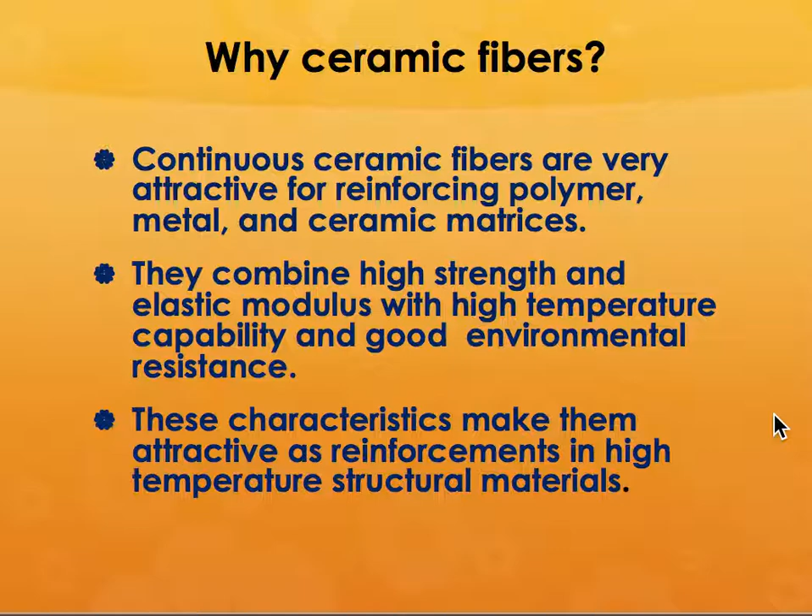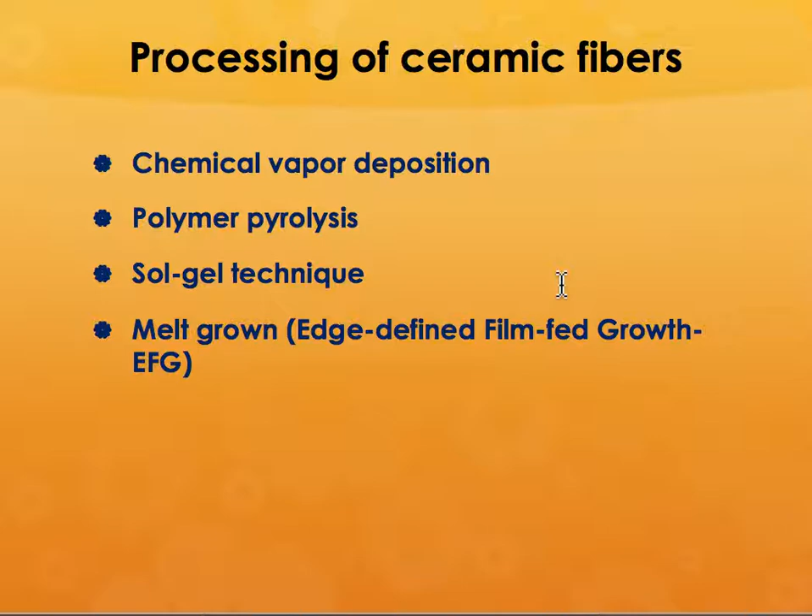So how do you process ceramic fibers? There are a couple of different ways to do that, and the most traditional method is chemical vapor deposition. You could also do it by a process called polymer pyrolysis or a sol-gel technique, where you take a squishy precursor, pull it through a set of dies, dry it, and heat treat it to get the high temperature properties of the material. You could also take a melt of the precursor and pull it through dies, but that is not as common as chemical vapor deposition or the sol-gel technique.

When we started out almost 25 to 30 years ago, there was a lot of effort being spent by the Department of Defense, Department of Energy, etc., to make ceramic components for automotive and other high temperature applications. But very quickly they figured out that it was necessary to reinforce this material with different kinds of fibers.

So when we started looking at silicon carbide fibers, silicon carbide matrices, or silicon nitride matrices, they figured out that you had to use something comparable - the silicon carbide fibers. But it was not easy to make silicon carbide fibers by the traditional methods. So what they did was use a substrate to deposit the silicon carbide matrix around it.

So the silicon carbide matrix was deposited around a wire of tungsten or carbon heated to around 1300 degrees centigrade. You take a reactive gaseous mixture such as hydrogen and methyl trichlorosilane, or what you would euphemistically call alkyl silanes.

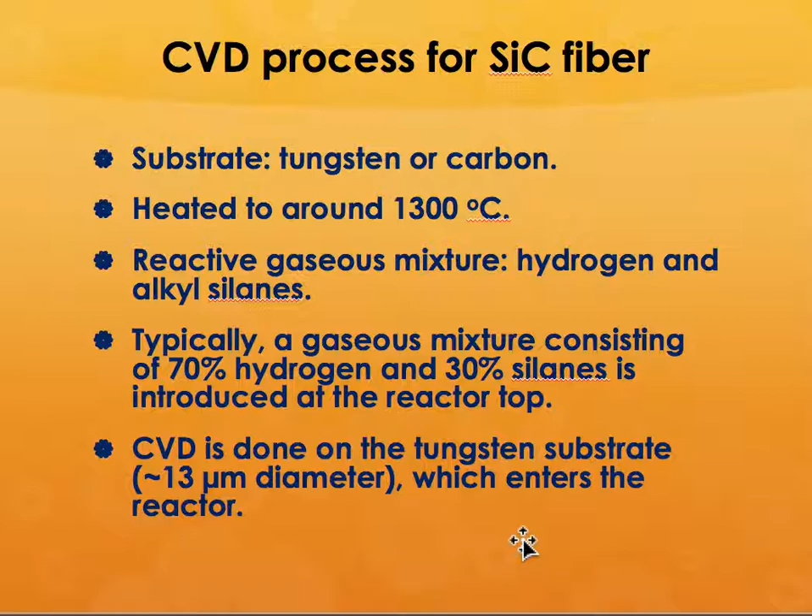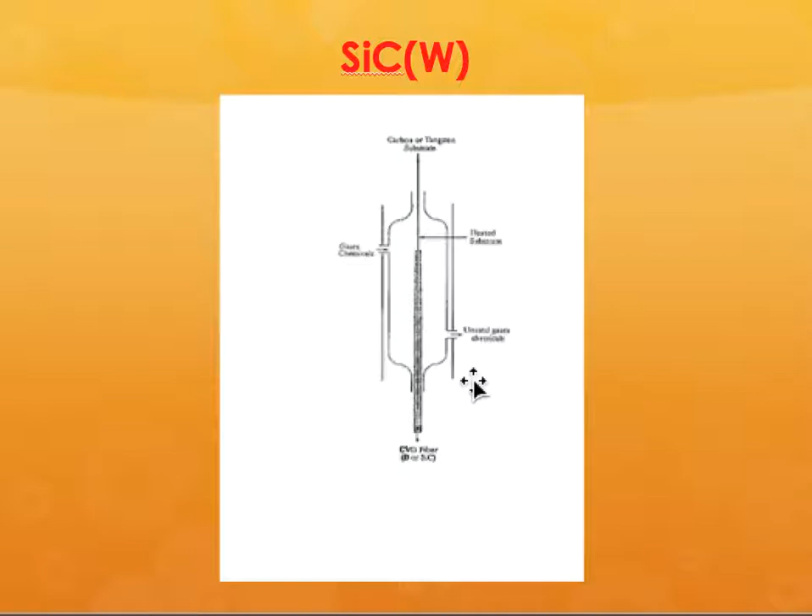So this is the schematic of the CVD process, where you are reacting it in a chamber, and while the fiber is being pulled through that, it deposits this silicon carbide matrix around the substrate.

As I said, it is methyl trichlorosilane, CH3SiCl3, and because it has one silicon and one carbon atom, you can get a stoichiometric ratio of silicon carbide. It forms a byproduct of hydrogen chloride gas.

Now what is special about hydrogen chloride gas? Hydrogen chloride gas is extremely noxious and corrosive, so you have to protect the inside of your chamber from getting attacked by the hydrogen chloride gas.

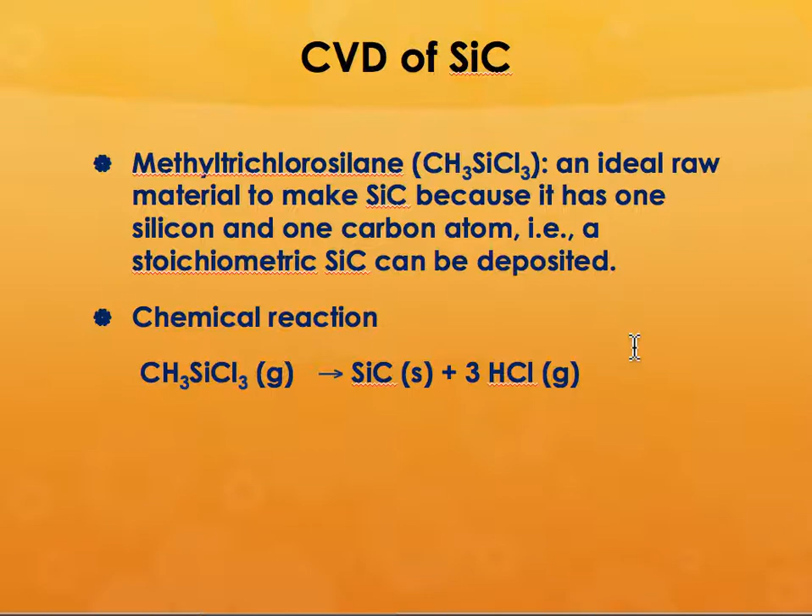Generally you mix free carbon and solid or liquid silicon with the silicon carbide itself. This monofilament can be as much as 100 to 150 microns, and unfortunately this large diameter fiber is not flexible. So you're taking maybe 100 of these pretty thick filaments, and you can't weave them. You can't do anything with that.

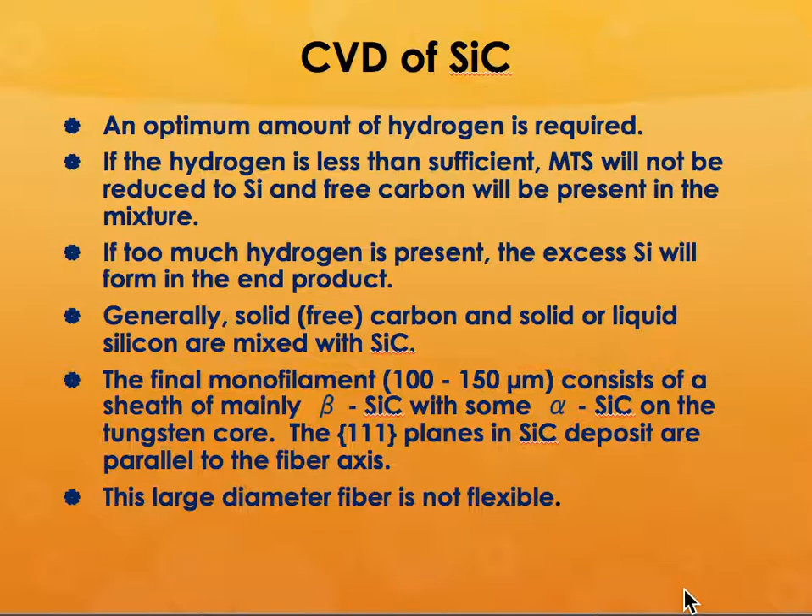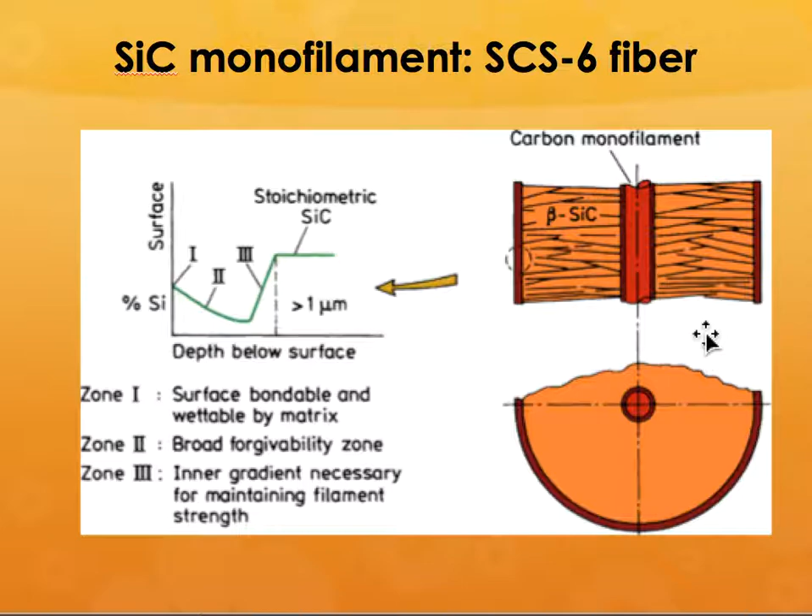This is again another schematic of the whole process. These fibers used to be called SCS-6. Now there are other technologies for making pure silicon carbide fibers, made in Japan and elsewhere, producing much smaller diameter fibers that can easily be woven.

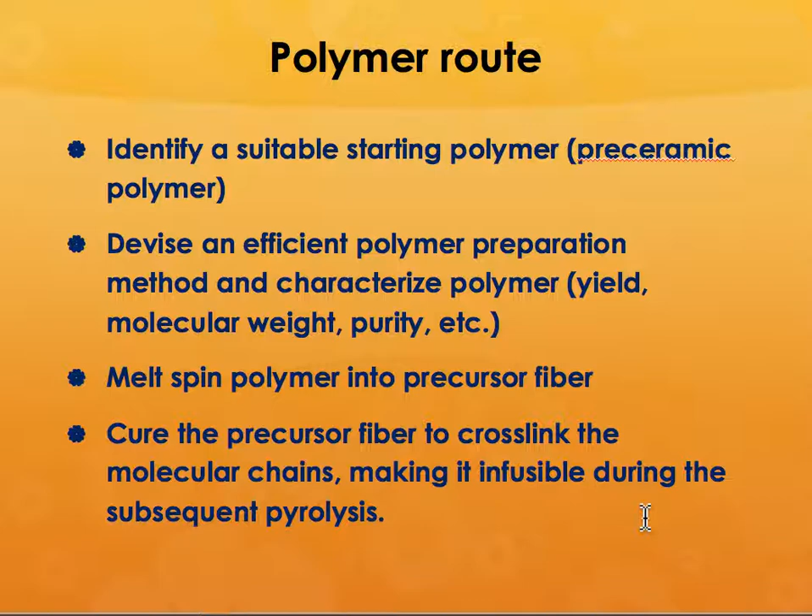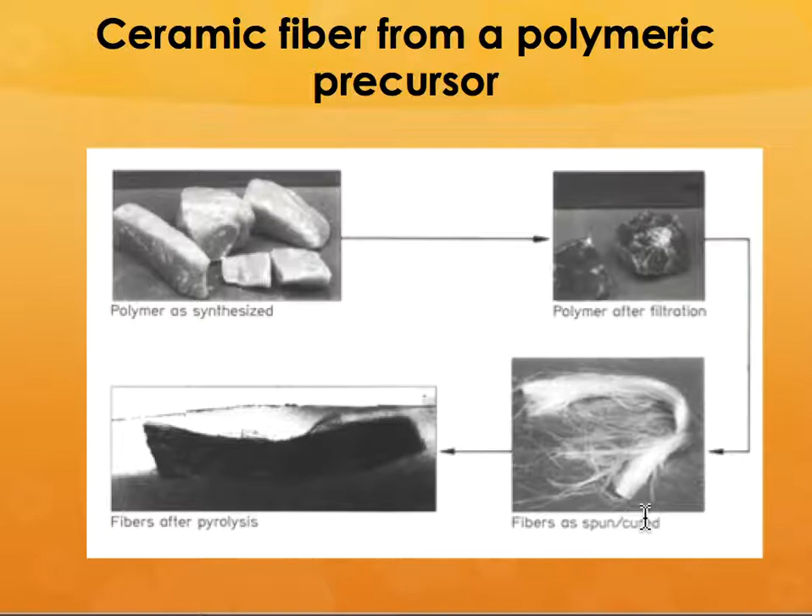This is typically done starting with a pre-ceramic polymer. You melt spin the polymer into a precursor fiber, then cure that fiber to cross-link the molecular chains, and then heat treat it to get the right kind of structure. These are the different steps of that process.

One of these processes is called the Nicalon or Yajima process, developed in Japan. Now, the problem in those days was that the silicon carbide fibers produced were not very pure, so it did not withstand certain conditions and would get attacked by the processing temperature, etc. So it was not a very good process, but now they seem to have overcome those problems and are producing much better fibers.

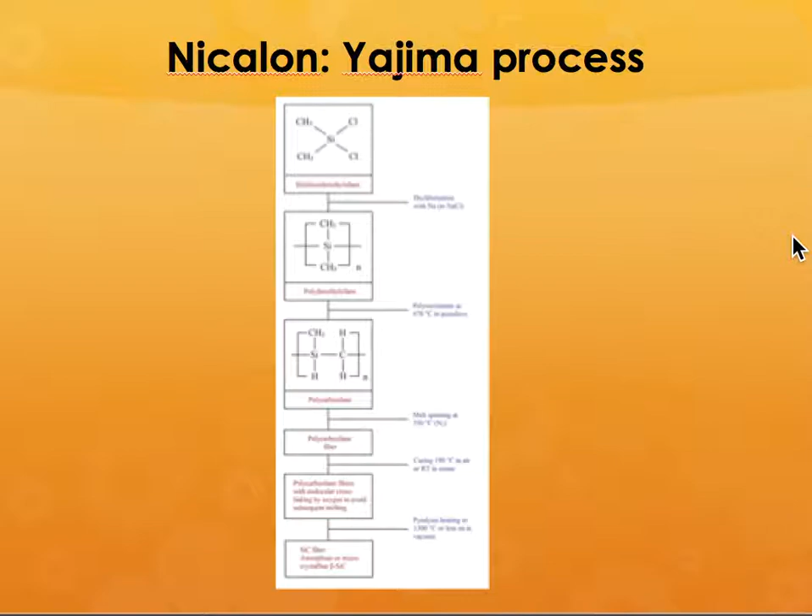There are also other fiber manufacturers such as Sylramic, supplying Sylramic fibers through companies such as COI, part of Orbital ATK in San Diego. Again, this is a schematic, so if you can please go and expand it, you will be able to see that.

So what are some of the advantages? You can see the tensile strength of these fibers. There is another fiber called Tyranno SA3. These have much higher Young's modulus and stiffness compared to the Nicalon or the Hi-Nicalon or the Hi-Nicalon S type of fibers.

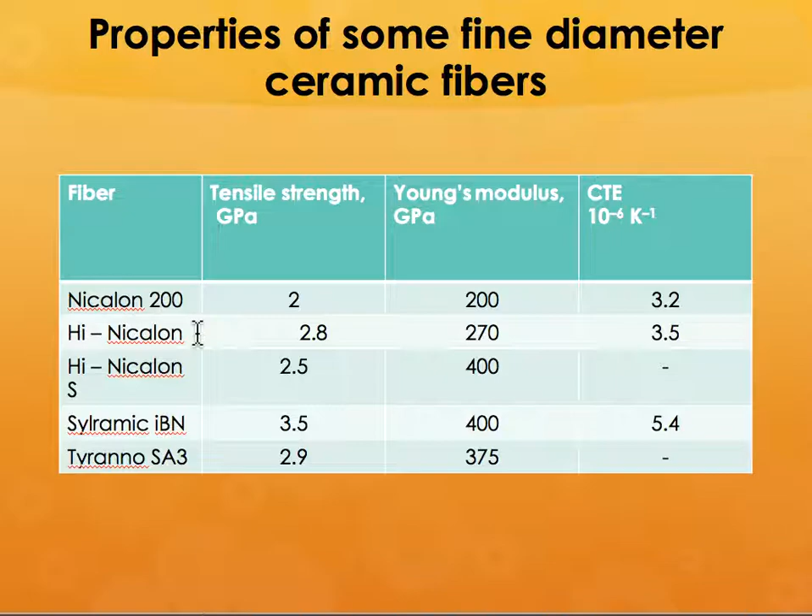The disadvantage with the Nicalon fiber is that it does not have very high thermal conductivity. When you make a component, especially these high temperature components, you need them to have very high thermal conductivity and low thermal expansion coefficient. So you can only do that with either Sylramic or Tyranno.

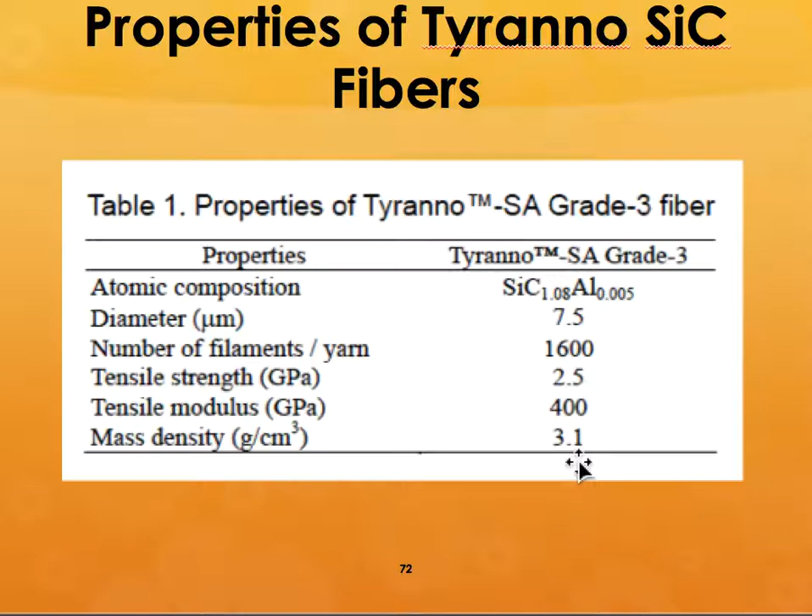So these are some of the properties of the Tyranno type of fibers. You can see much higher strength, and the density is also pretty lower compared to the standard silicon carbide fibers.

Tyranno is made, again, in Japan by a manufacturer called Ube, and it is supplied through COI in San Diego, California.

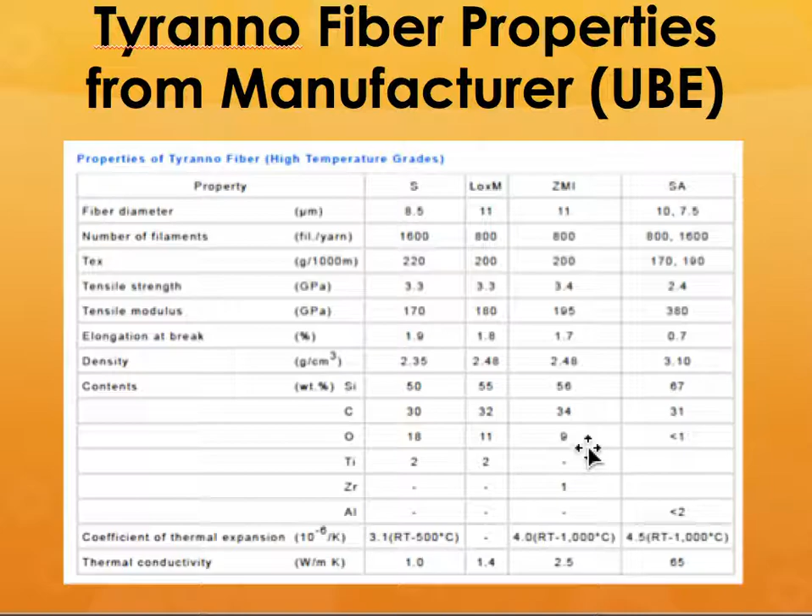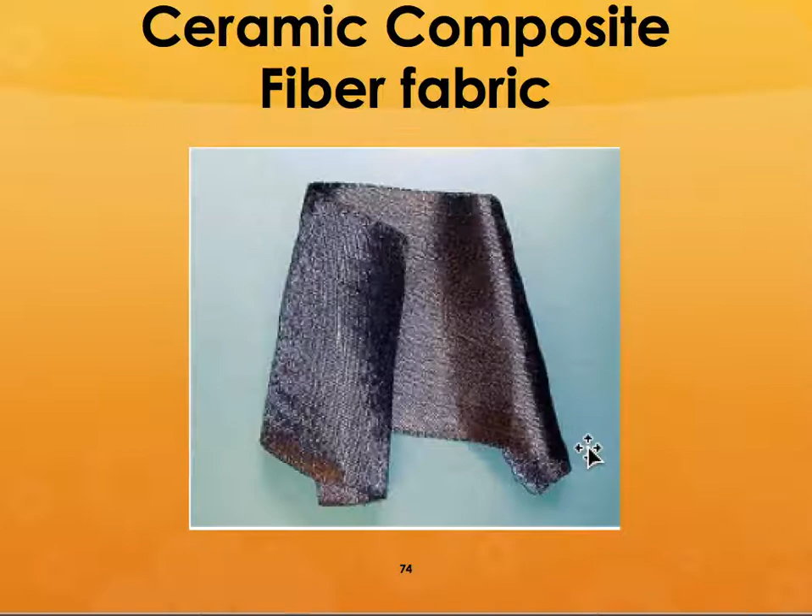So this is the type of fabric that you get, and you can take that and make it into a composite by pre-pregging it or using it for chemical vapor infiltration, etc.

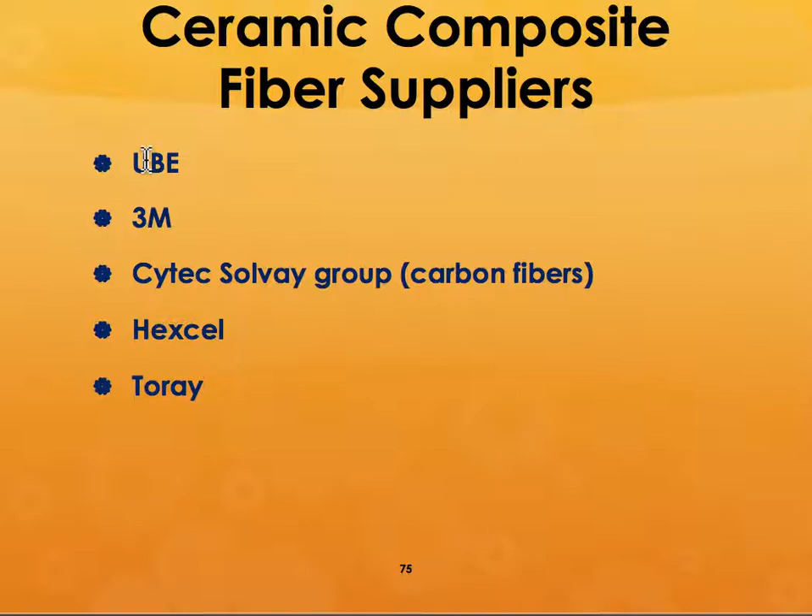These are the different suppliers for ceramic fibers. The carbon fibers are supplied by Hexcel, Toray, and Cytec, and Ube and 3M also supply fibers. Ube supplies the silicon carbide fibers, whereas 3M supplies the alumina fibers.

If you look at the Nicalon fibers, you can see that the fracture initiates from one corner, so it is an extremely brittle fiber, and it radiates out into the rest of the fiber itself.

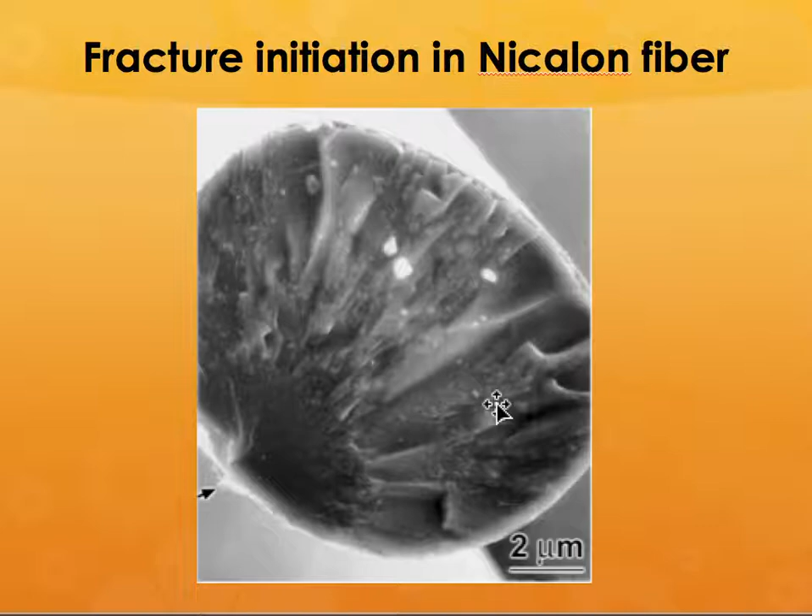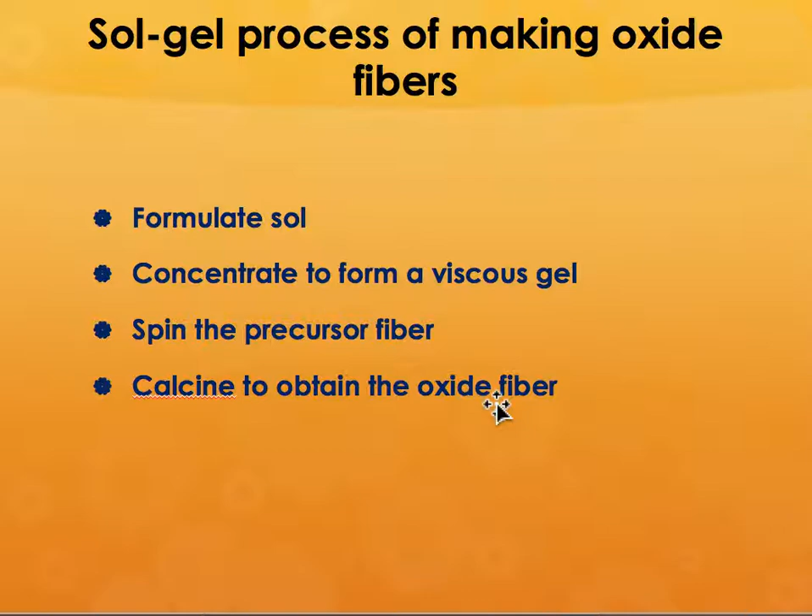The process for making alumina or zirconia type fibers is slightly different. You have to use a process based on the sol-gel process. You formulate the sol, which is a liquid precursor of the ceramic material, then concentrate it to form a viscous gel, pull out the fibers, spin that, and then calcine it to produce the oxide fibers.

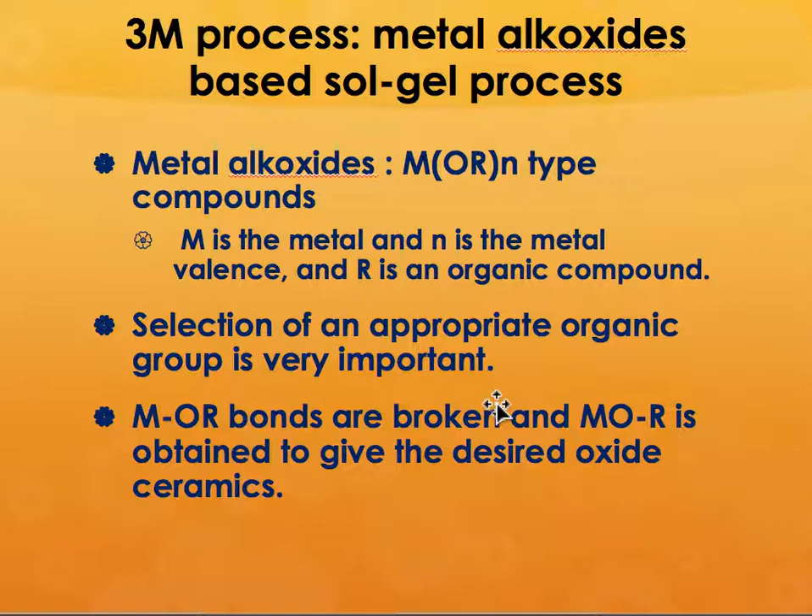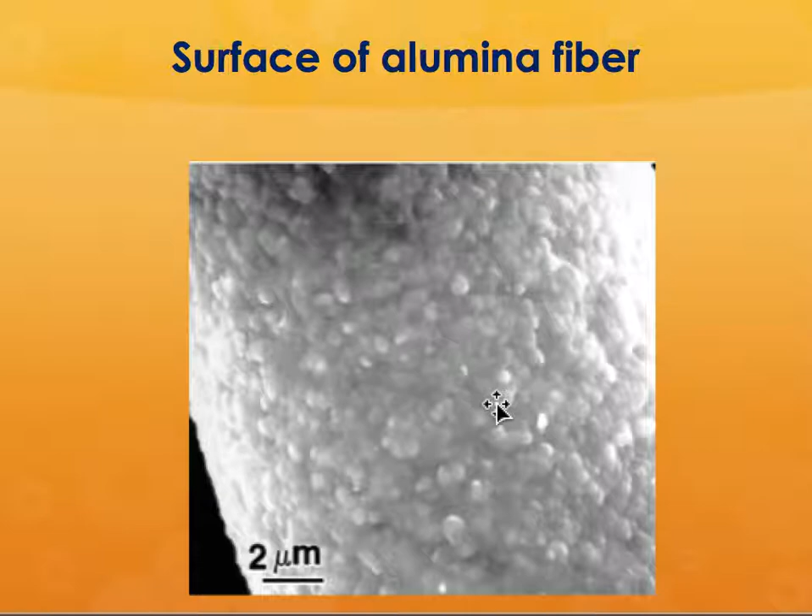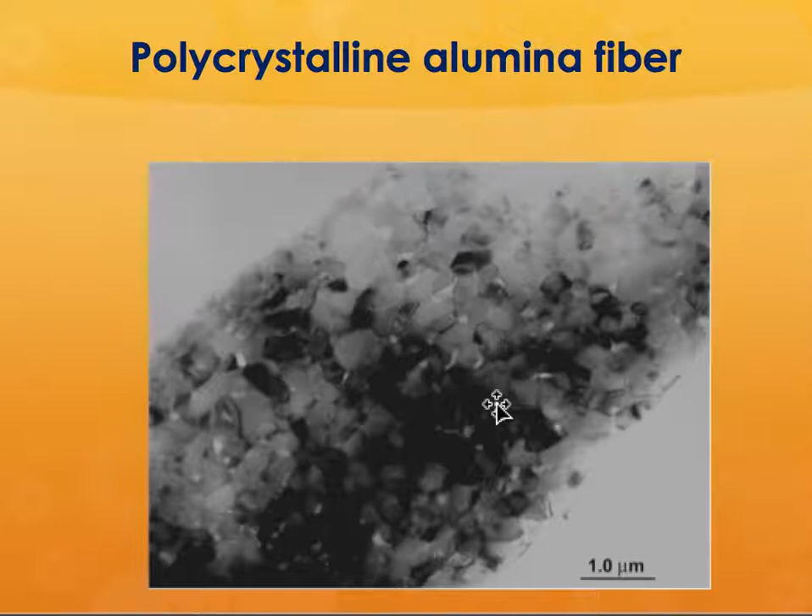These are some different variations of the carbon fibers and alumina fibers. I won't go too much into that. You can see this is the surface of an alumina fiber, and it is polycrystalline. It's a very crystalline type of fiber, unlike carbon fibers or silicon carbide fibers, etc., which are not crystalline.

There are a number of different types of alumina fibers produced by the 3M Corporation. These are all available under the trade name Nextel, which is also used for things like the body suit of a firefighter. These are all Nextel 312, 440, 550 up to 720. Nextel 312 is the most common variety. It's not a very highly strong or highly pure form of alumina itself.

It contains a lot of ingredients that reduce the strength of this fiber, but the advantage is that you can do melt spinning of this fiber at a much lower temperature compared to other types of fibers. The more common ones are 610 and 720. The 440, 550, and 650 are not as common. These are all based on alumina-silica precursors, and you get a very fine diameter type of fiber through this process.

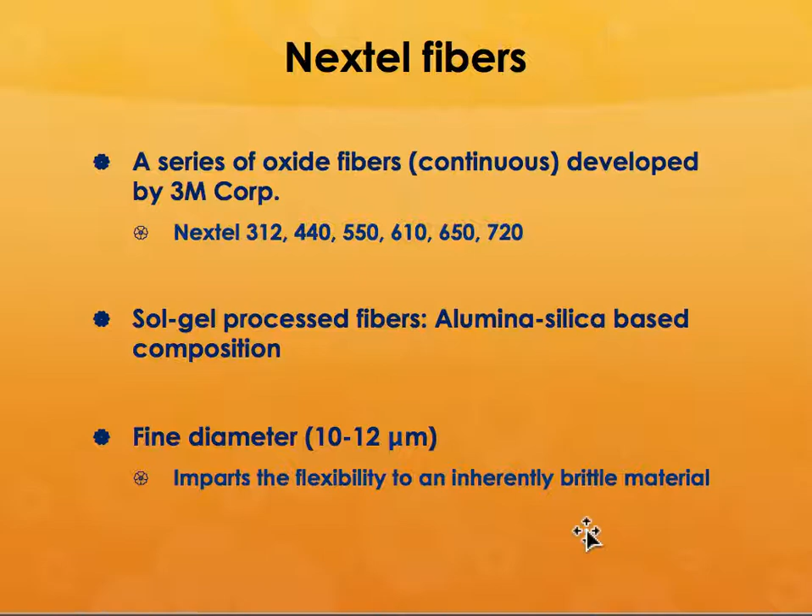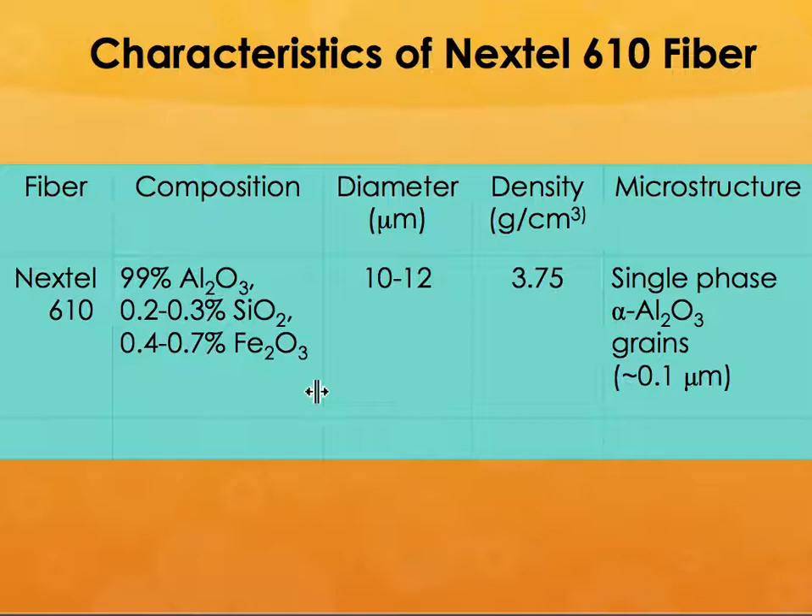What are the advantages of some of these fibers? For silicon carbide, for example, if you have a component undergoing creep or fatigue, these materials have pretty high resistance to creep-type failure processes.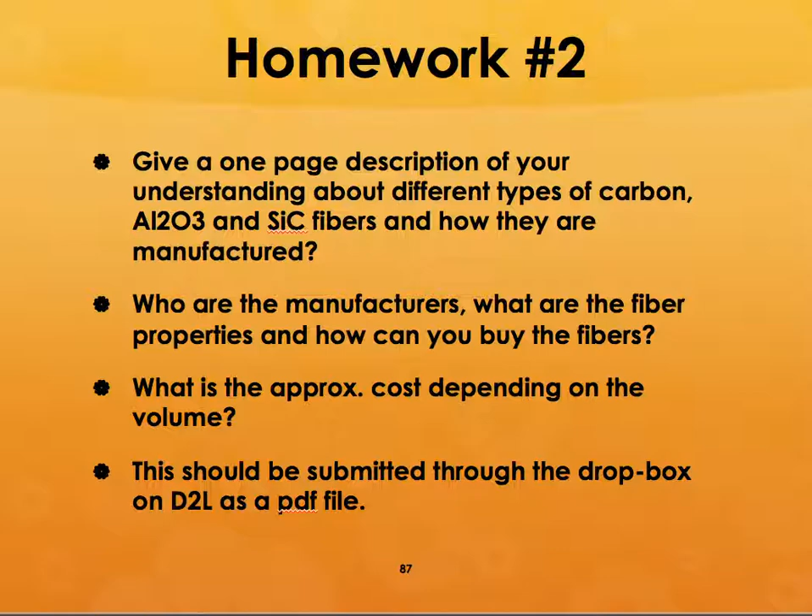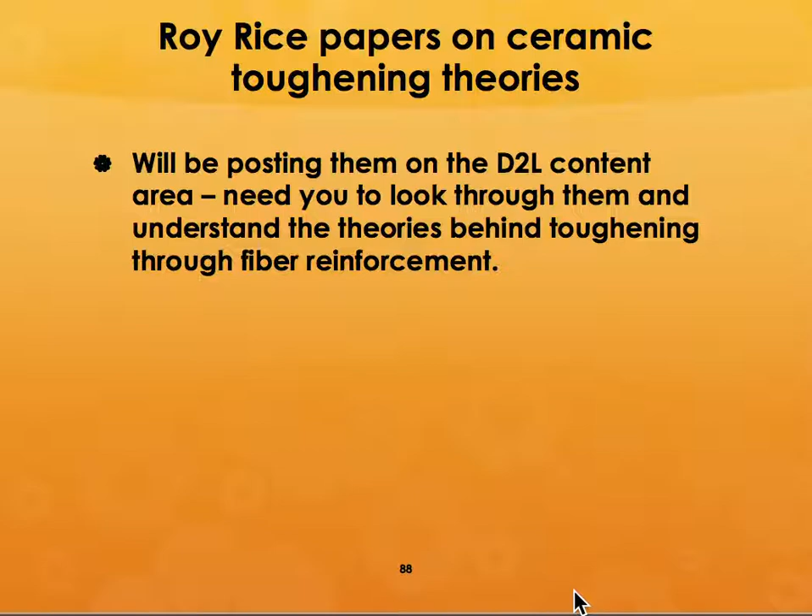I posted these papers on ceramic toughening theories, and I will also be posting a paper by a person called Anthony Evans. He presented a fantastic paper at the American Ceramic Society conference, which used to be in Cocoa Beach every January. In fact, it'll be going on starting this Sunday, and his paper was probably the one attended by the largest number of people at that conference.

Almost 600 to 700 people attended his talk, so everybody was interested in that. Aveston, Kelly, and Cooper developed the theories behind composites, but Tony Evans is the one who discussed and told us for the first time about the effect of the interface in a ceramic composite. So we are eternally grateful.

Unfortunately, he passed away a couple of years ago due to cancer. In fact, many of our famous ceramists and composites people have died recently. We don't know exactly for what reason, but anyway, we are really grateful to him for having tried to explain the properties of these composites for the use of a lot of us.